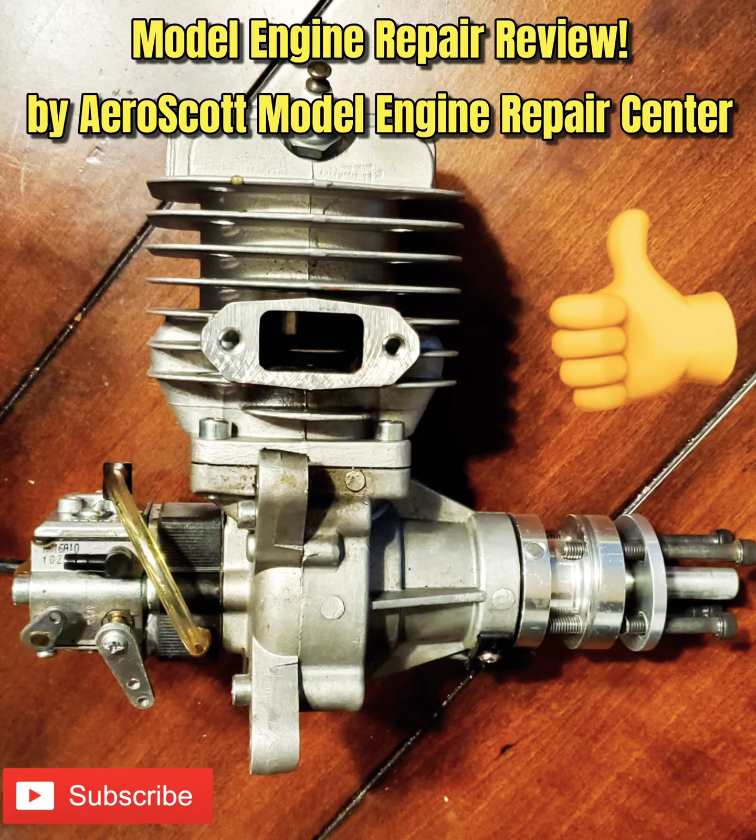You're in for a treat. This is a model engine repair service review. Something a little different, so stay tuned.

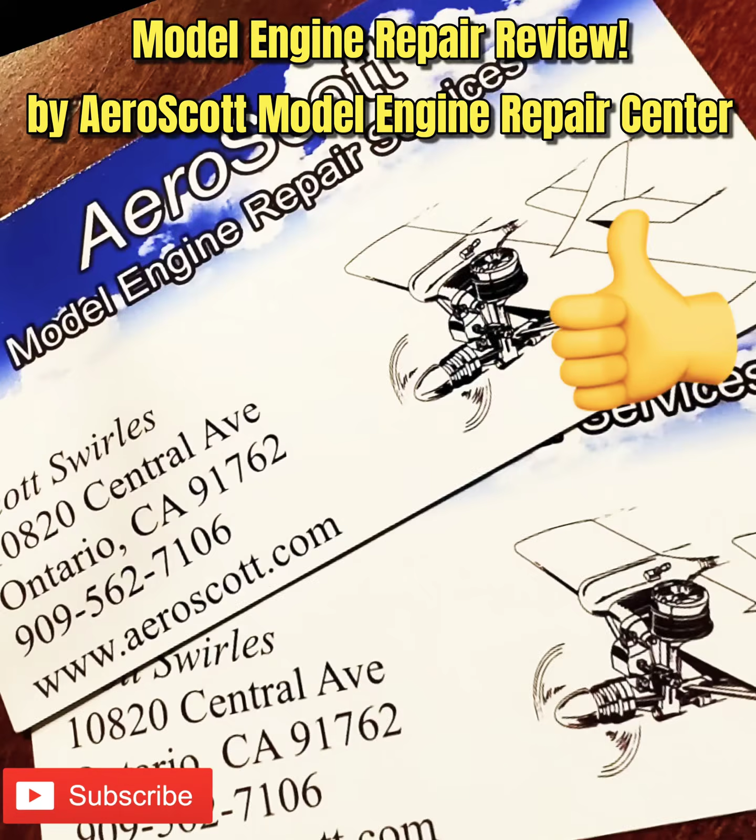Alright guys, we're doing something a little different this time. We're going to do a quick review of a model engine repair service called AeroScott, and he does excellent work. If you ever need a gasoline engine rebuilt, this is going to be your guy. So many times people buy model airplane gasoline engines and something goes wrong and they don't know how to fix it. AeroScott actually repairs these engines, gets them back to a running status, and does an excellent job. He wraps them up very well too. This is how they come, and we're going to open it up and see what's going on.

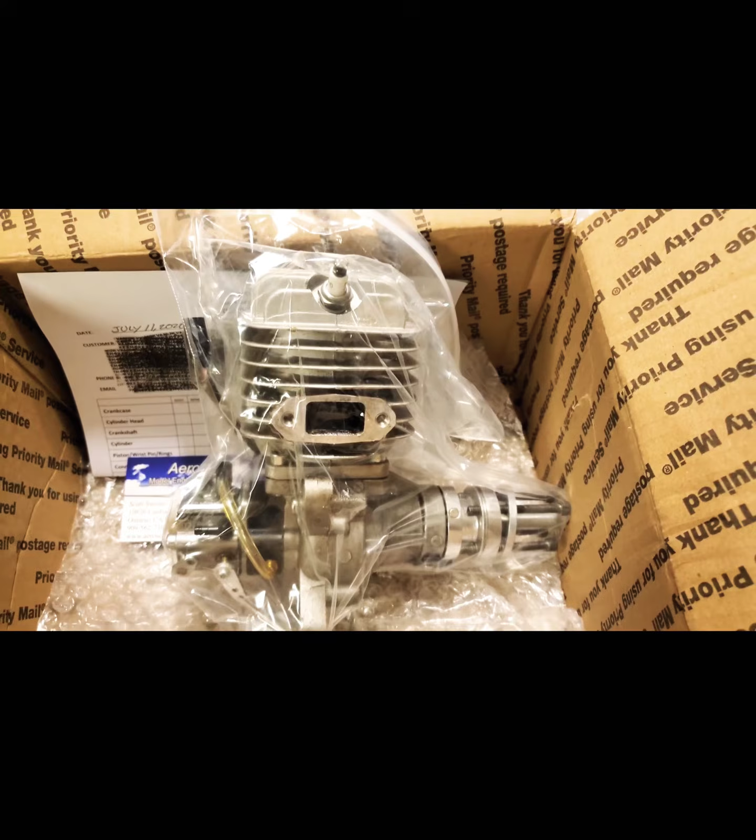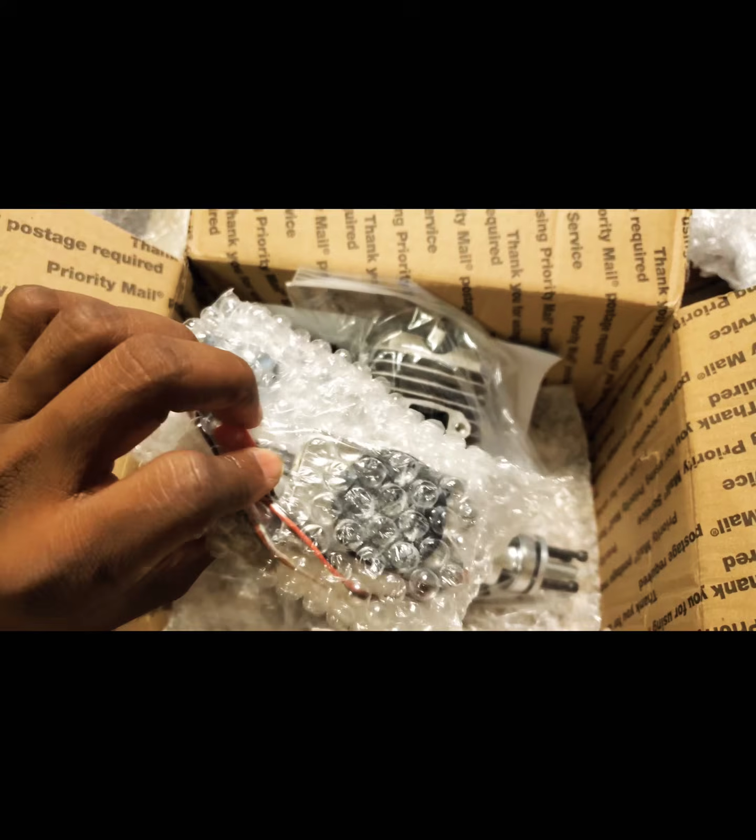The engine we're looking at is an RCG 50cc, and he did some great things to it. Okay, dug into the bag and got the engine already wrapped up. Everything is good and secure, coming fresh from the factory, a brand new rebuild. Everything's looking good, we've got the muffler and everything. One thing they ask you to do is put everything in the box so they can look at everything to make sure it's all good. You can see the electronic ignition is still wrapped up, and it's looking really good. Excited to see and have this engine back.

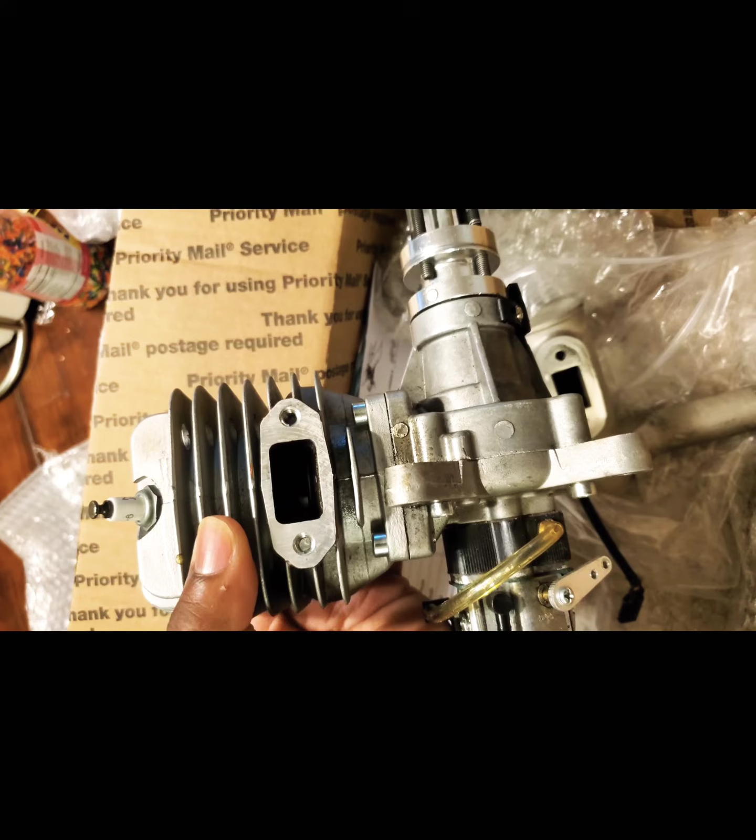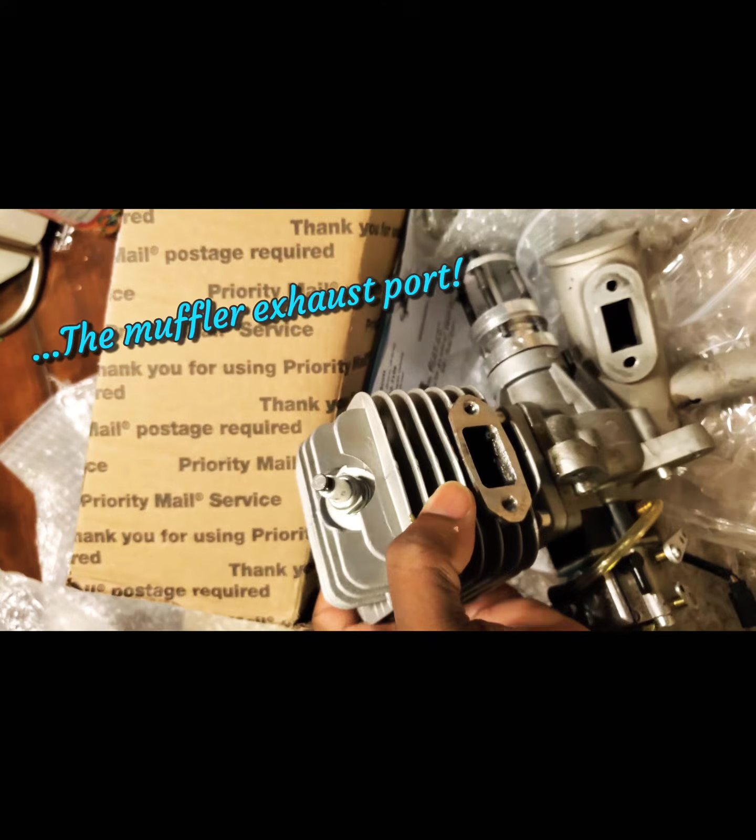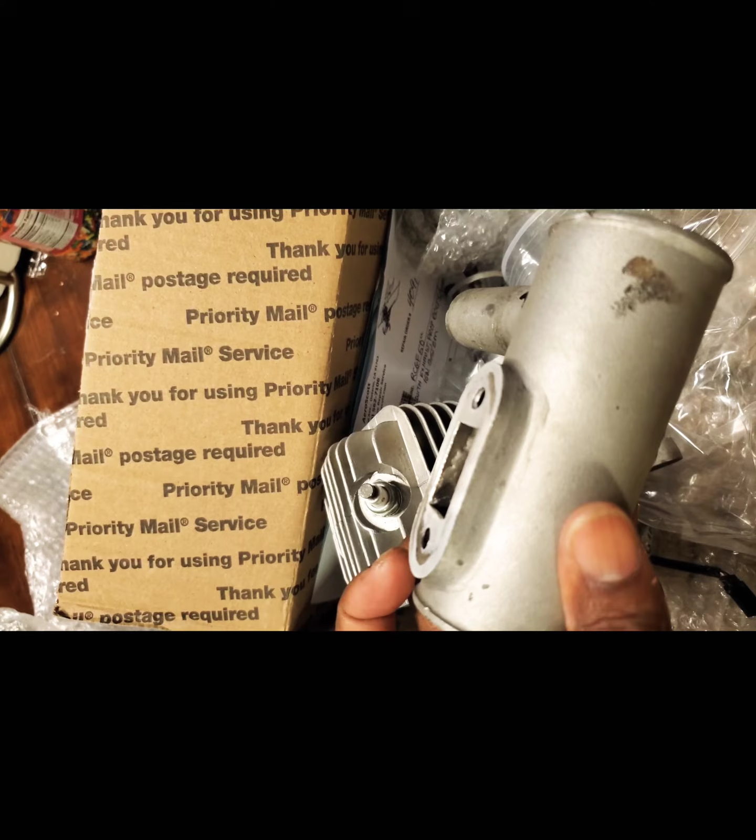One thing you can see we had done was the muffler bolts to the cylinder head were pretty much wallered out, so you can see exactly what happened there. What I had the guy do was go in there and put in Heli-coils, steel Heli-coils, so we won't have any problems out of it. And it looks great. He went in and took some material off of the jug there and made it so it had a nice flush fit. You can actually see right there how it was resurfaced. It's super smooth, so we're not going to have any problems out of this whatsoever, and it's just looking really good.

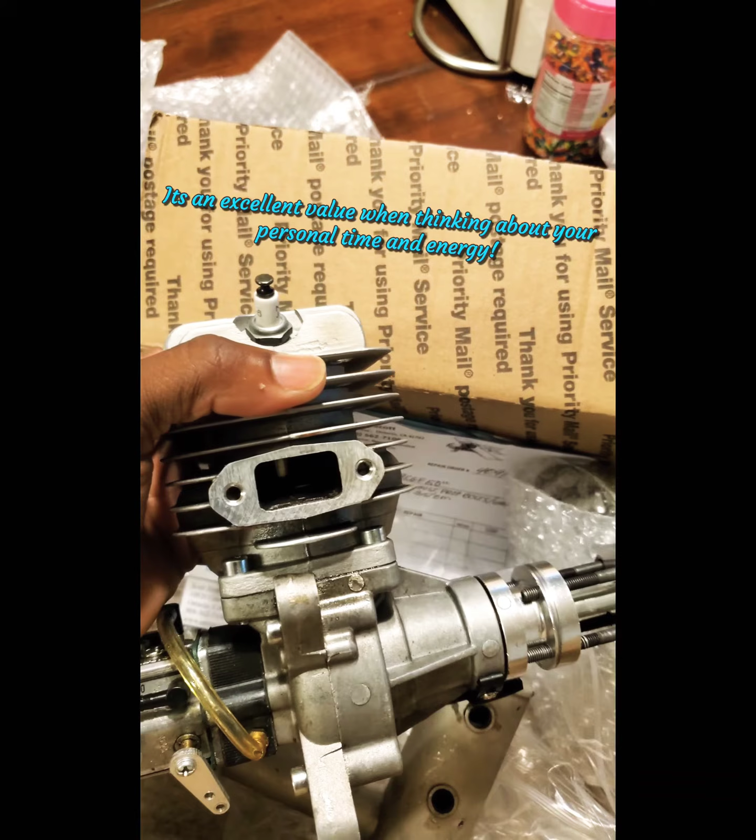I'm excited about it. I paid 55 bucks for the 2 Heli-coils. For somebody who doesn't know their way around model engines, having an expert who's comfortable taking these things apart and putting them back together, making sure you got good quality parts and a good engine that's going to last you a long time, you can't beat it for the price. Aeroscott does a great job.

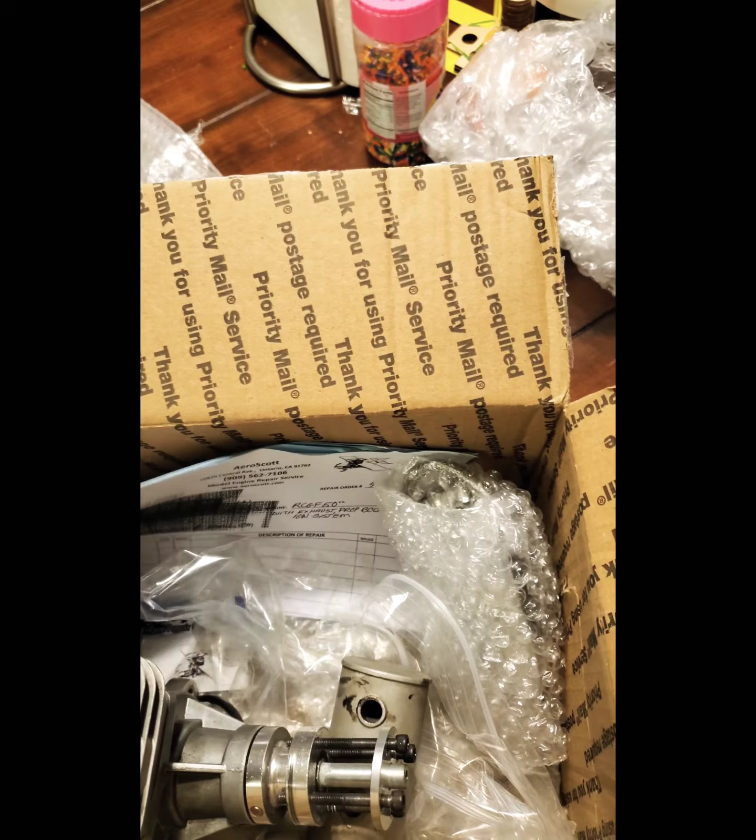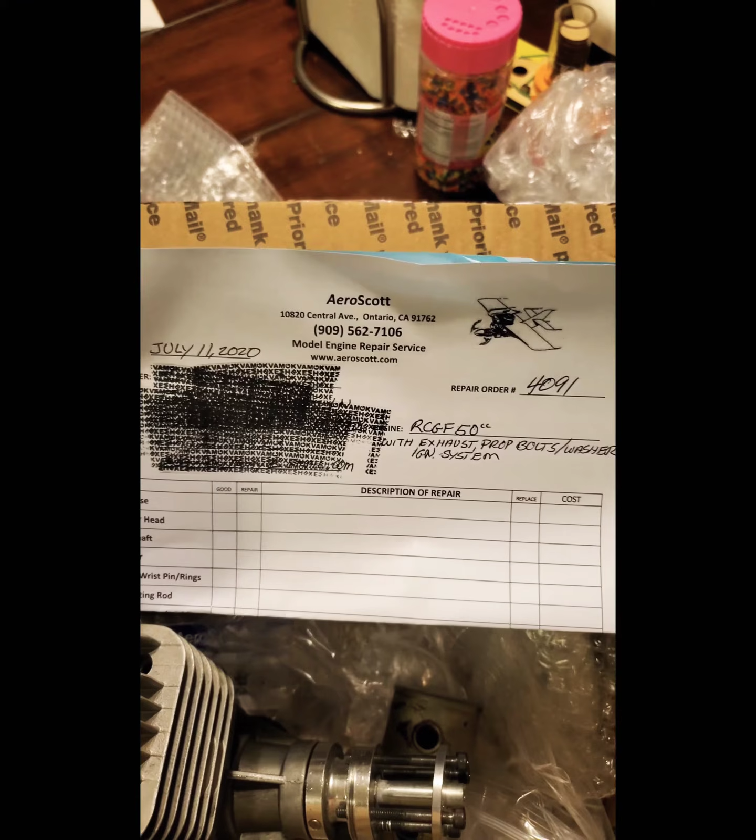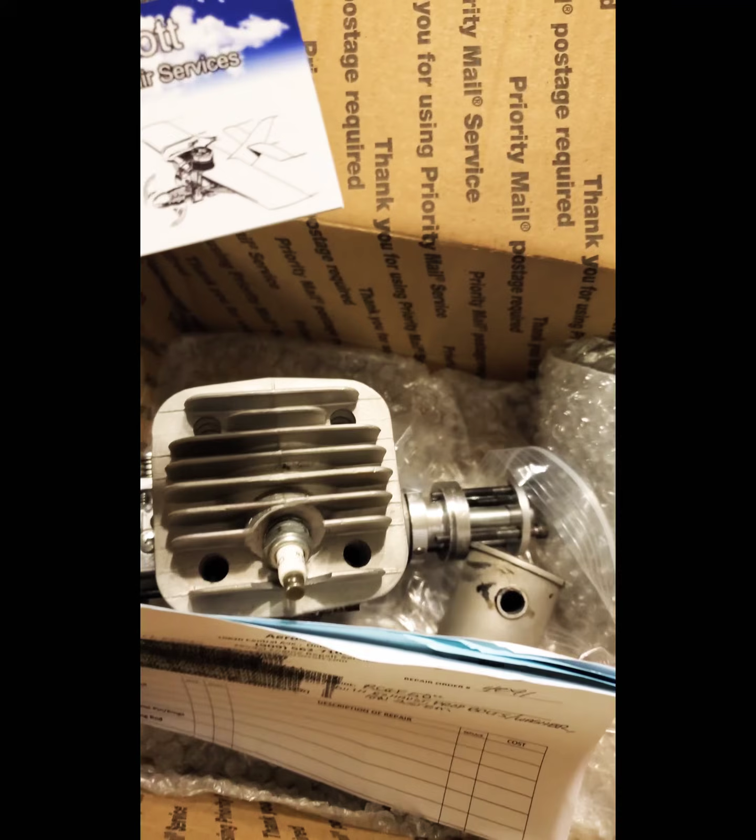You can see it right here, and it looks pretty good. It's an RCGF 50cc with the exhaust, prop bolts and washer, and the ignition system, and everything's looking pretty good. I'm excited about it and super thankful for the repair. So we'll see how this goes. One thing I really liked was that he took a picture of the engine as he was doing the repairs, to let me know he was a real person doing a good job and that it was almost ready. I thought that was an A+ job, just having that done.

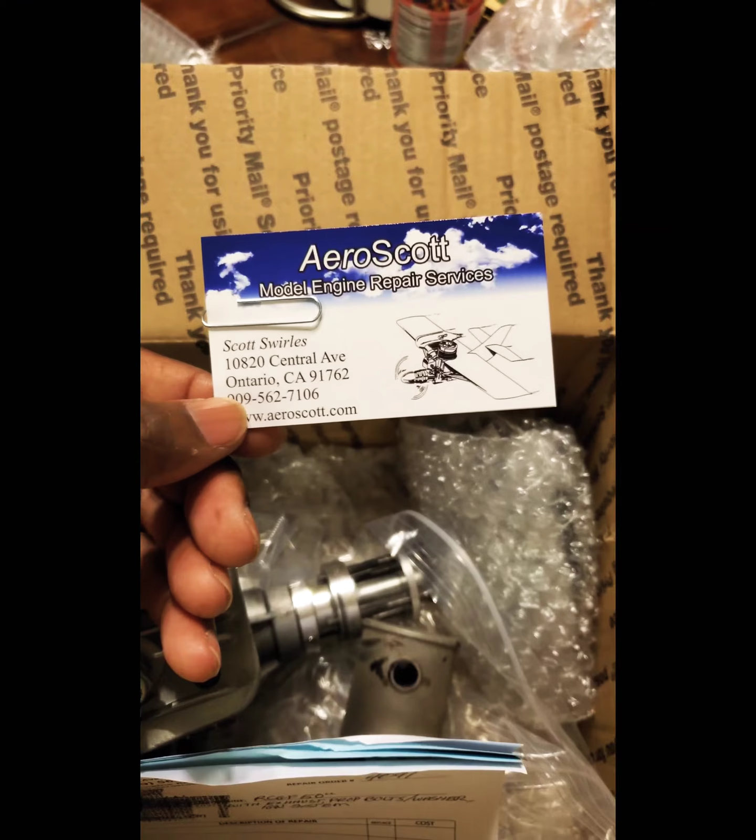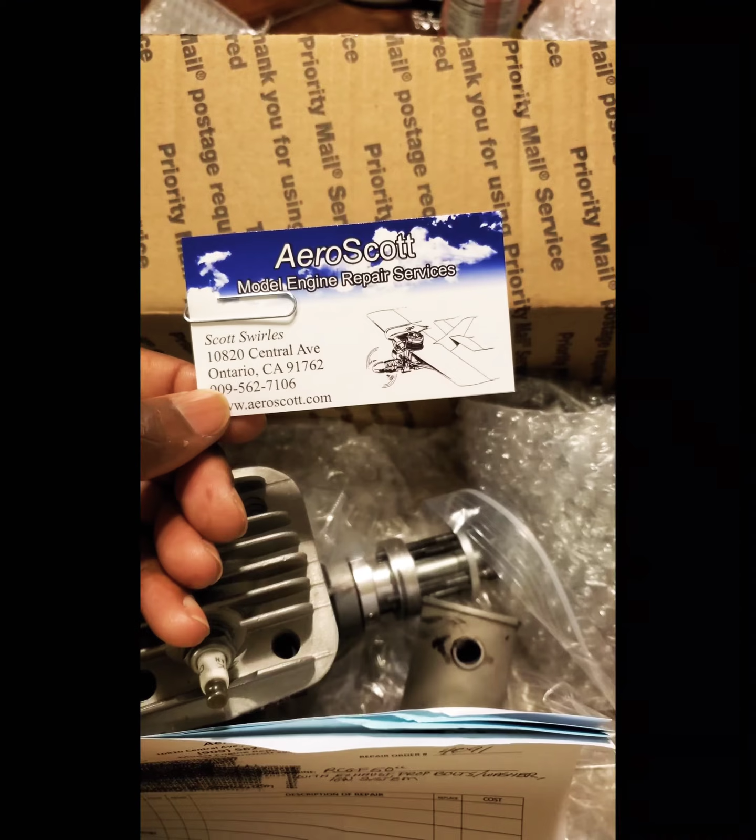So it makes you feel a little bit better about the whole process and getting the engine taken care of. But I think it's going to be a great engine. It looks good, in excellent tip-top shape. So we'll take a look at it and see how everything goes.

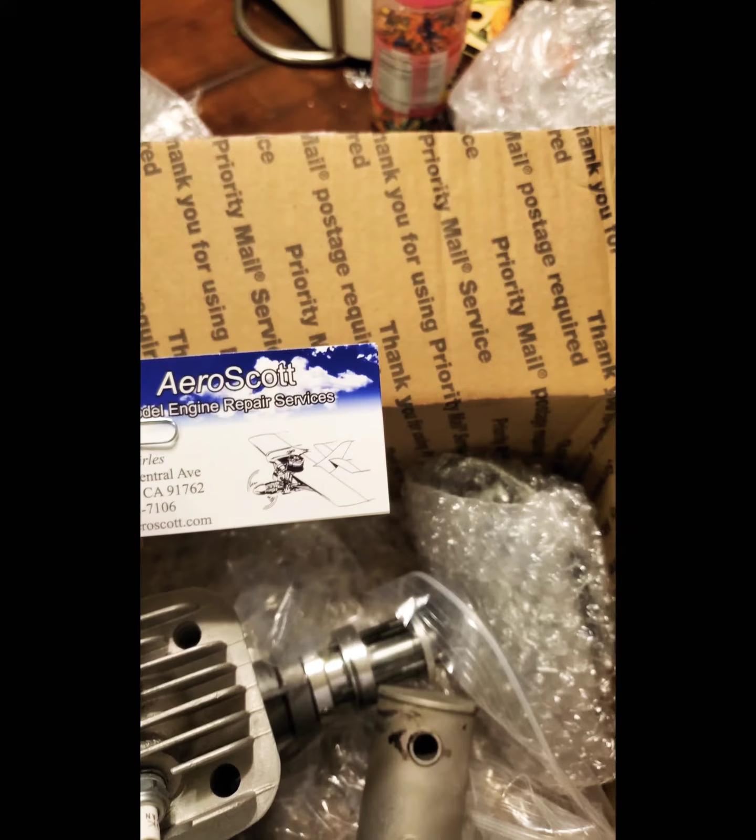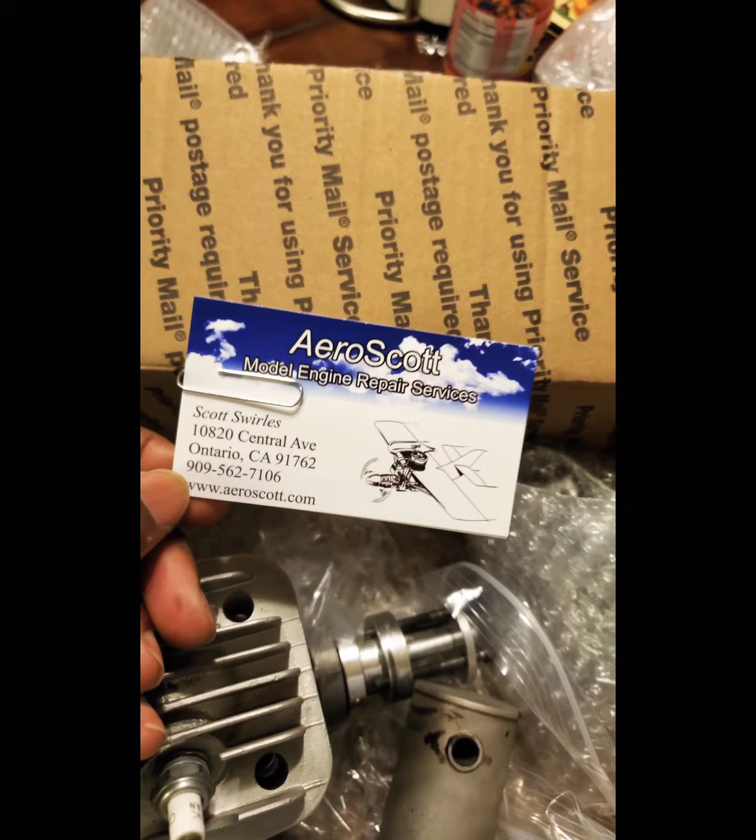Aeroscott.com is the model engine repair service that was used, run by Scott Swirles, and they do excellent engine repair work. They work on 2-strokes, 4-strokes, gasoline engines of all sorts, and even DLA engines. If you need some help and knowledge, and you're trying to save some money on an engine, send it to these guys and see what they can do.

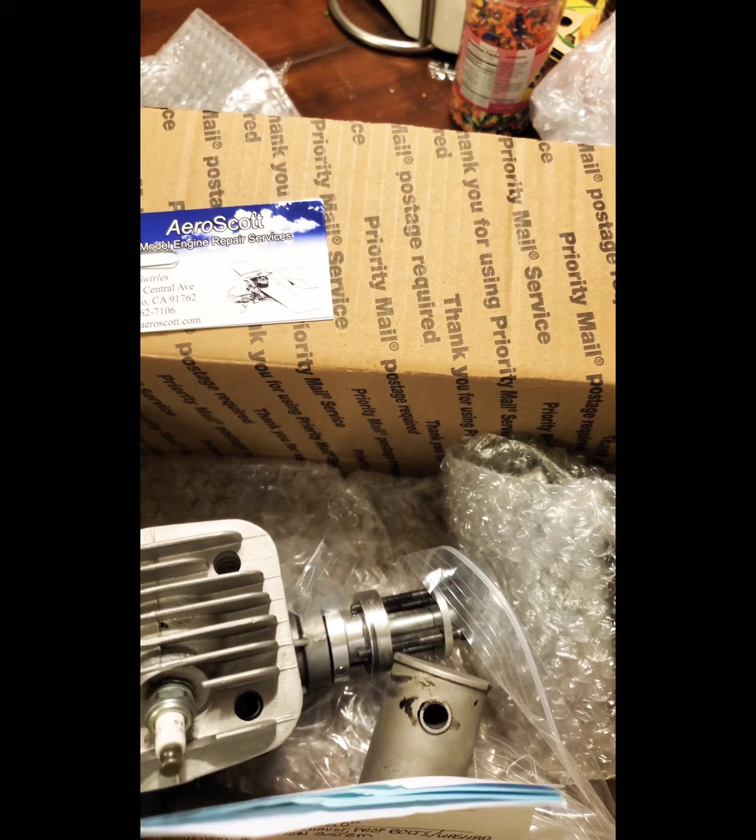As far as I'm concerned, I'm very happy with the quality of the repair and the build. If you have any issues and need anything, don't feel like you can't reach out to this guy, and he'll help you out the best he can. Runs a top-notch A+ business.

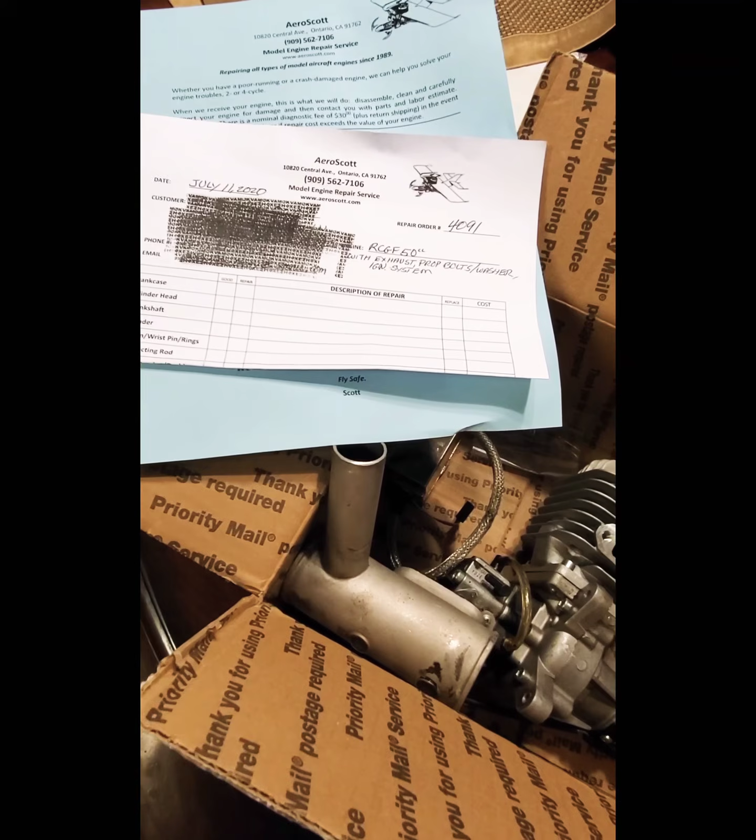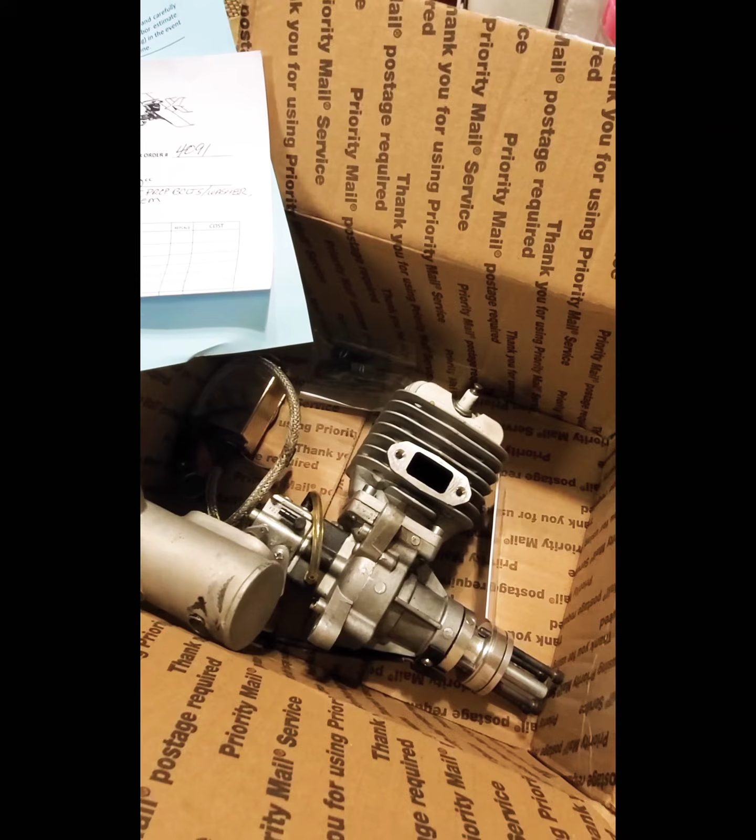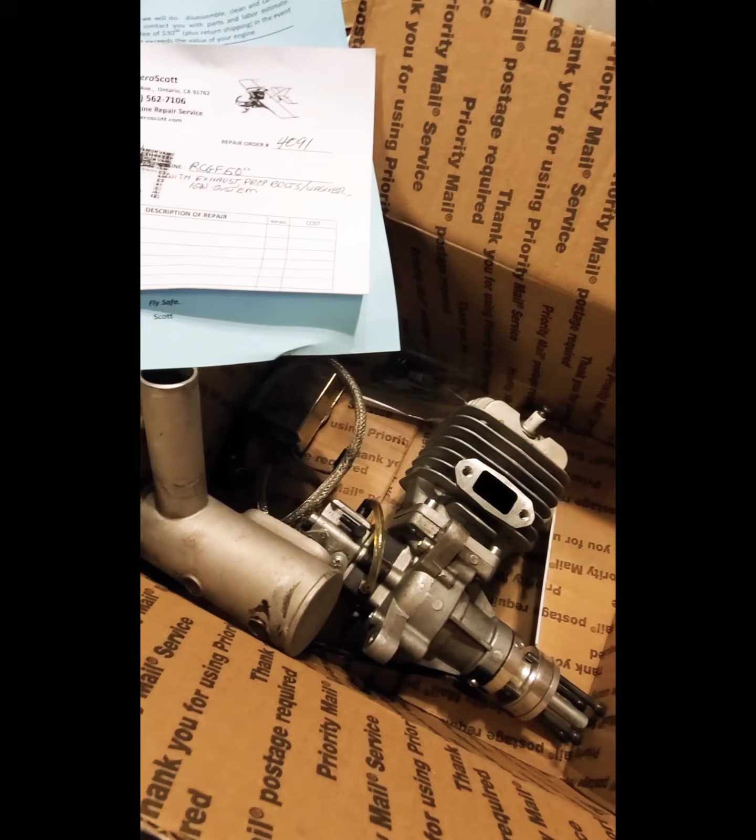I'm not one of those guys that tries to talk up business for anyone, but when you experience really good business and speak to the person who owns the company, have a great conversation, and know they're knowledgeable and giving you fair prices, and the shipping's quick, you feel pretty secure sending in an engine. We had a conversation, on topic and off topic, for a while. It was just a great experience, and the icing on the cake was him knowing exactly what he's talking about and sending pictures of the repair work as it was being done and when it was completed. It's just top notch. You don't really get that a lot.

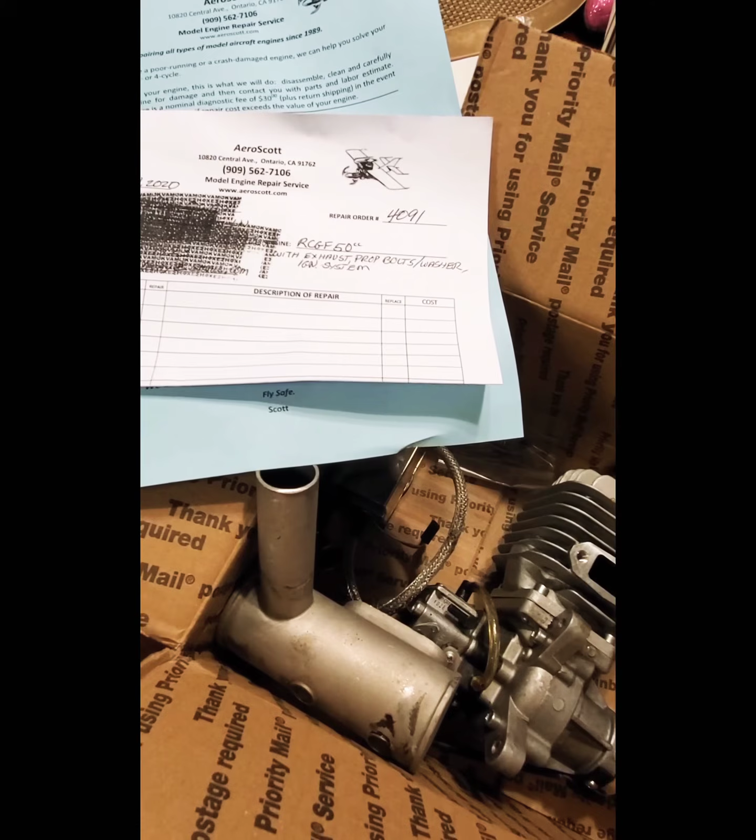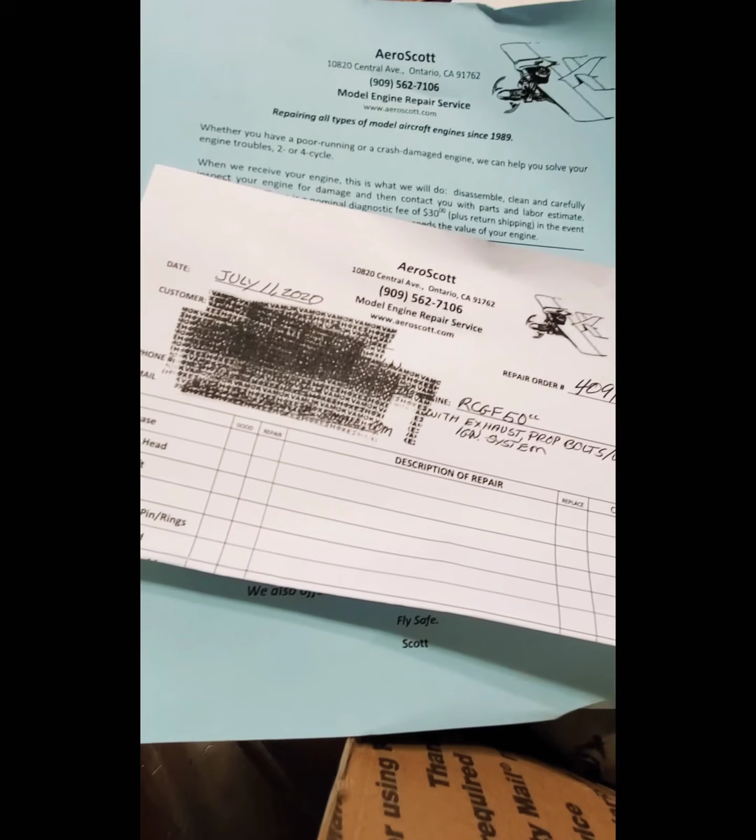If you're thinking about some engine repair work and you have some sitting around that needs work done, send them to this guy. He's a small business, and these are the guys we got to keep in business because they keep the airplanes flying, and they're not the big box names. I don't know if you're familiar with Clarence Lee - he's gotten up in age and kind of gotten away from it, so he's passed the torch to AeroScott. This isn't a plug for him, but if you get good service, you should pass the word around, and that's exactly what we're doing.

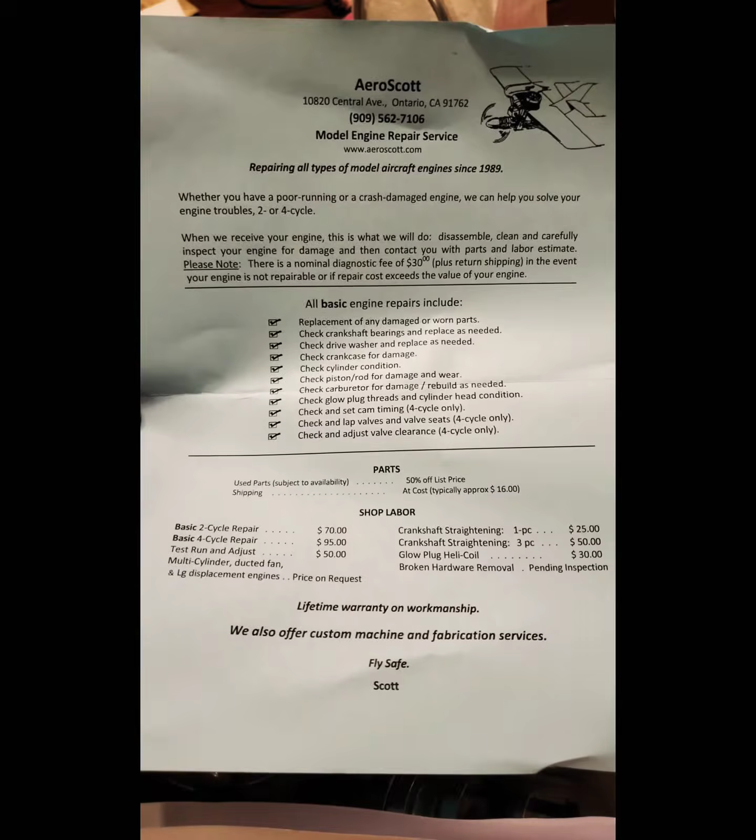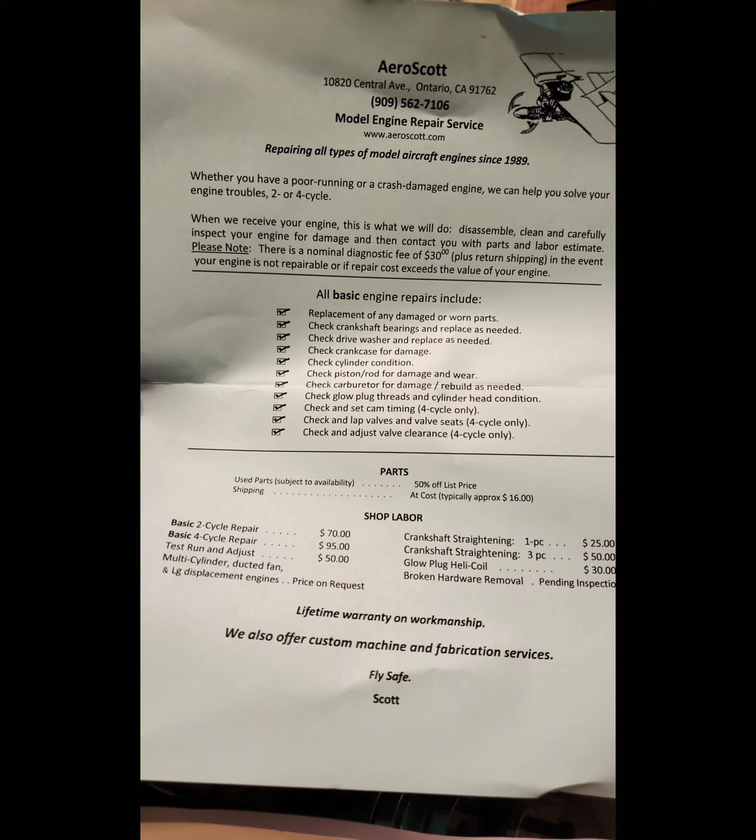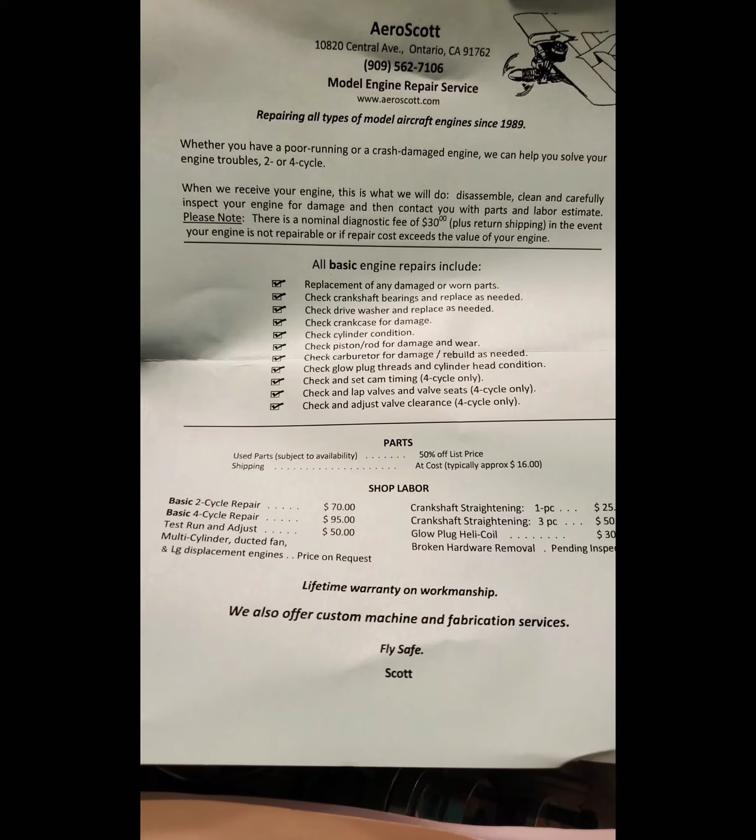I wanted to share a couple things about the engine repair and all types of engines. He's been doing it since 1989, and they do all kinds of basic engine repairs, replacement of any worn parts, crankshaft bearings, drive shafts, drive washers, crankcase damage, cylinder conditions, pistons, rod, carburetor damage. They rebuild pretty much anything and everything. They check glow plug threads and cylinder head conditions, cam timing for four cycle engines, and they just do all kinds of repair, and their prices are pretty cheap.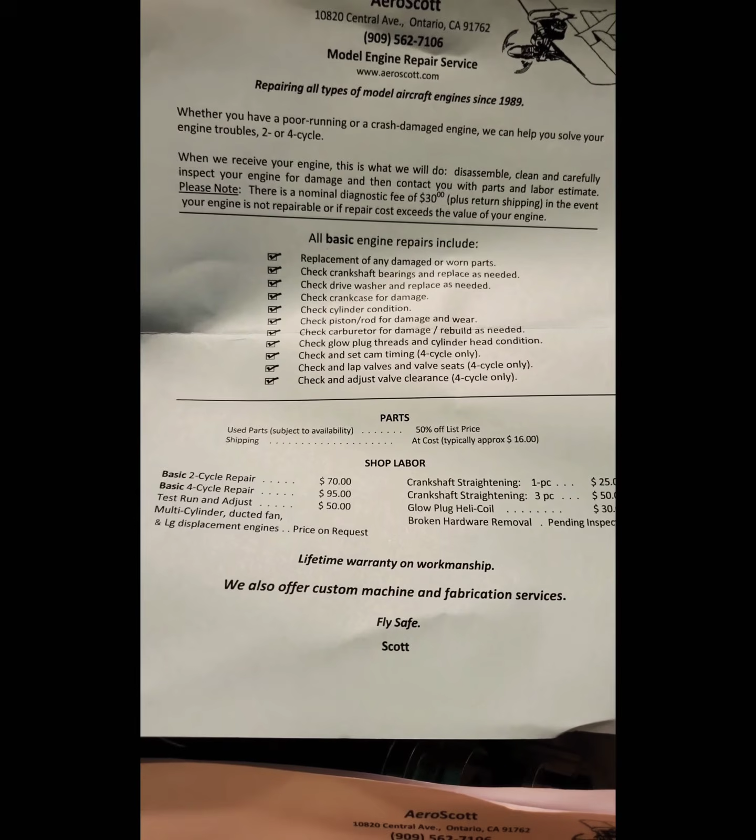Look at the prices here - they're very affordable. If you don't know your way around and you don't want to send stuff into Horizon Hobby, and it takes weeks, this is the guy to go to.

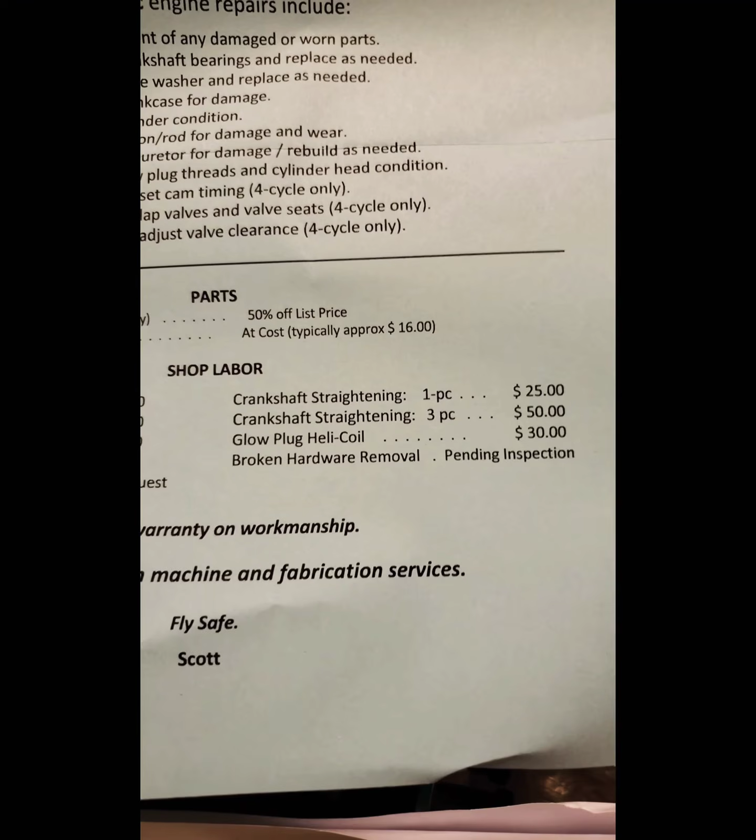You bend a crankshaft, this guy can straighten it out. He has everything that you need - Heli-Coils, broken hardware removal, you name it. So like I said, if you need something done, this is going to be the guy to get it done.